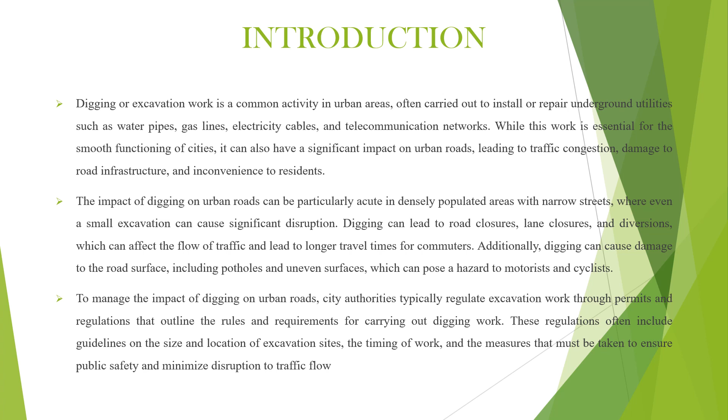Objectives: minimizing disruption. The primary objective of managing the impact of digging on urban roads is to minimize disruption to the community, including motorists, pedestrians, and businesses. This involves planning and coordinating the work to minimize the impact on traffic flow and access to buildings and residences.

Ensure safety. Safety is a critical objective in managing the impact of digging on urban roads. This involves implementing safety measures to protect workers, motorists, pedestrians, and cyclists. Safety measures may include the use of barriers, warning signs, and traffic control devices.

Protect infrastructure. Protecting existing infrastructure is an essential objective in managing the impact of digging on urban roads. Maintain functionality. Another objective of managing the impact of digging on urban roads is to maintain the functionality of the road networks.

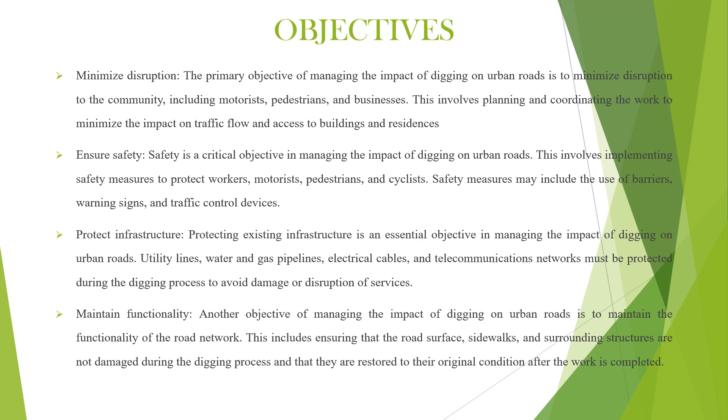Reduce cost and time. Effective management of digging on urban roads can help reduce the cost and time required for the work. Enhance communication.

Communication is a critical objective in managing the impact of digging on urban roads. Clear and effective communication between stakeholders, including utility companies, contractors, local government officials, and the community, can help ensure that the work is completed safely, efficiently, and with minimal disruption to the community.

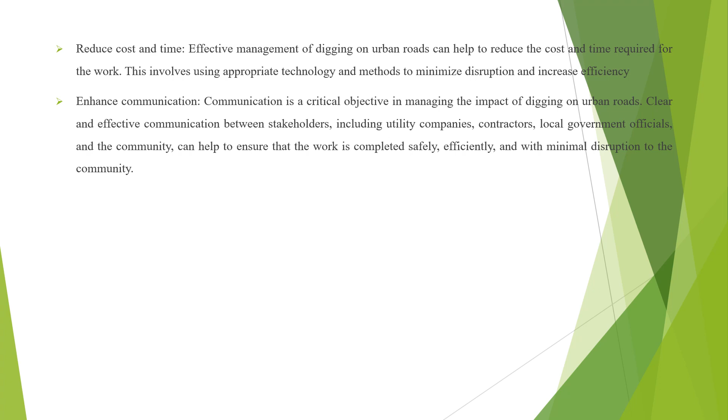Literature review. Clopper and Haddock conducted an economic analysis of utility cuts on pavement performance. The study found that the cost of repairing pavements damaged by utility cuts exceeded the revenue generated by the utility companies.

Reddy and Rao studied the impact of road cutting on pavement performance in urban areas. The study found that road cutting caused significant damage to pavements and resulted in decreased pavement performance.

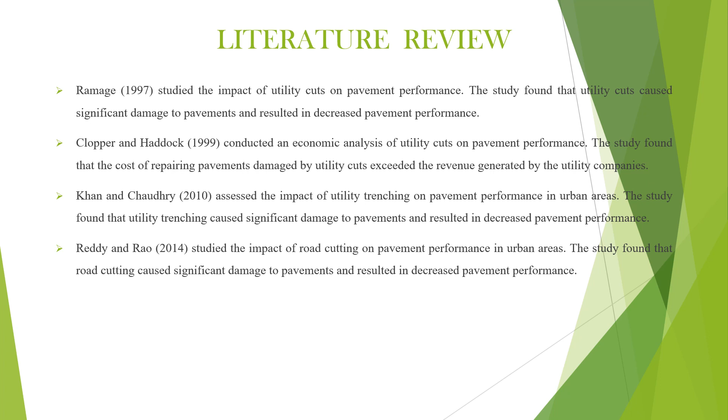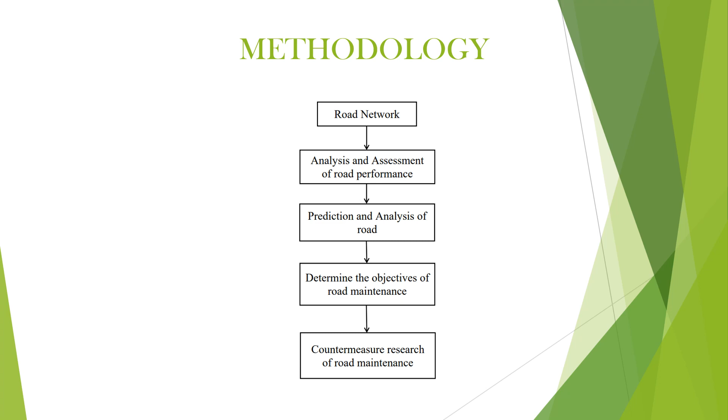Methodology: how it works. First, road networks. Based on that, analysis and assessment of road performance is done. Later, prediction and analysis of the road will be conducted. Then, after conducting that, determining the objective of road maintenance will be done. Later, countermeasure research of road maintenance is done. This is the methodology: road network.

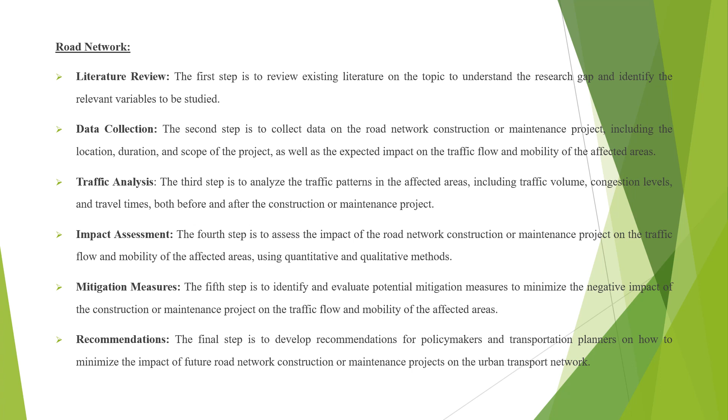It includes literature review, data collection, traffic analysis, impact assessment, mitigation measures, recommendations, and analysis and assessment of road performance.

Defining the research problem. The first step is to define the research problem, which in this case is to analyze the impact of digging on road performance and urban transport.

Literature review: the next step would be conducted through review of the relevant literature and research studies in the field of road performance and urban transport.

Data collection: the methodology would involve collecting data on the digging activities and their impact on road performance and urban transport. Data analysis: the data collected would then be analyzed using statistical tools and techniques to determine the impact of digging on road performance and urban transport.

Assessment of road performance: the methodology would also involve assessing the overall road performance, taking into account the impact of road digging activities. This may involve developing performance indicators such as travel time, traffic volume, vehicle speed, and air quality.

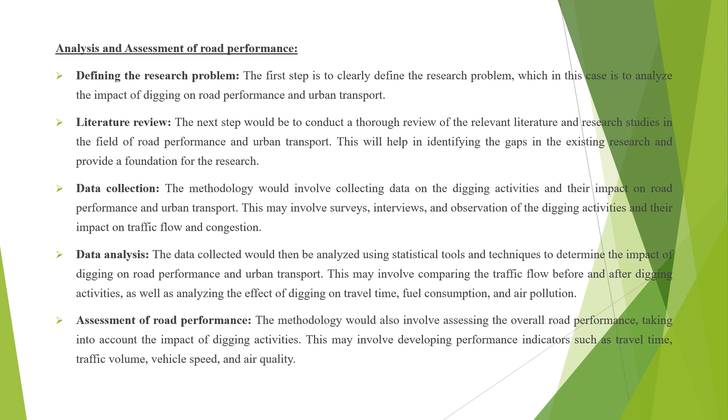Recommendations: based on the analysis and assessment of road performance, the methodology would also include developing recommendations to mitigate the negative impact of digging activities on urban transport.

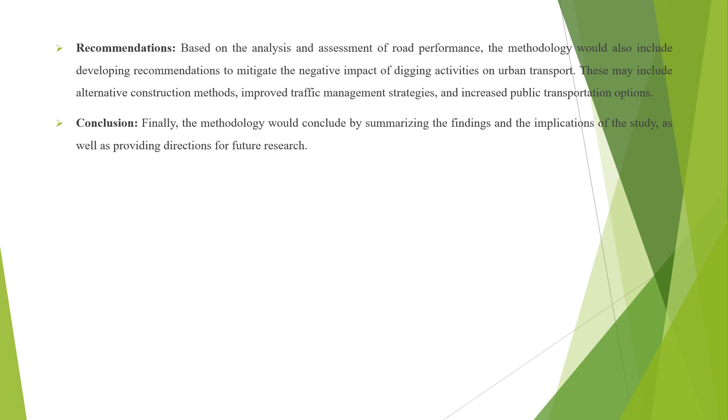Conclusion: finally, the methodology would conclude by summarizing the findings and implications of the study, as well as providing directions for future research.

Prediction and analysis of road: to predict and analyze the impact of digging on urban transport, several factors need to be considered. These include location, duration, scope, and traffic volume.

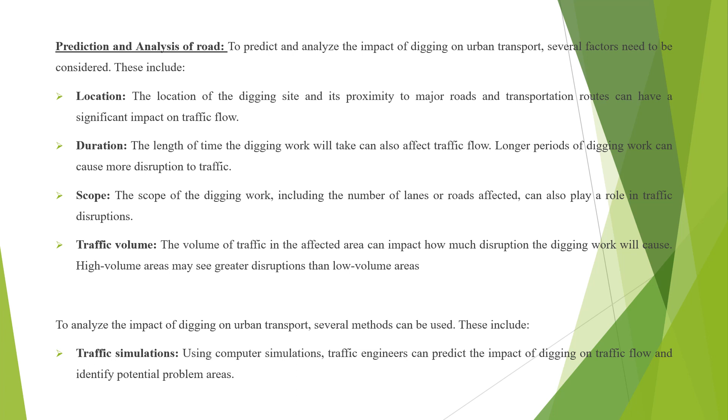To analyze the impact of digging on urban transport, several methods can be used. These include traffic simulation, traffic counts, surveys, and GPS tracking.

Determine the objectives of road maintenance: ensuring the safety of road users. Maintenance activities should aim to ensure that the road is safe for all types of road users, including pedestrians, cyclists, and motor vehicles.

Minimizing traffic congestion: digging activities can cause traffic congestion, and road maintenance should aim to minimize the impact on traffic flow.

Maintaining the road's structural integrity: digging activity can weaken the road structure, and maintenance activity should aim to ensure that the road is able to handle the traffic load without any structural damage.

Reducing the environmental impact: maintenance activity should aim to minimize the environmental impact of digging activities on the road and surrounding areas.

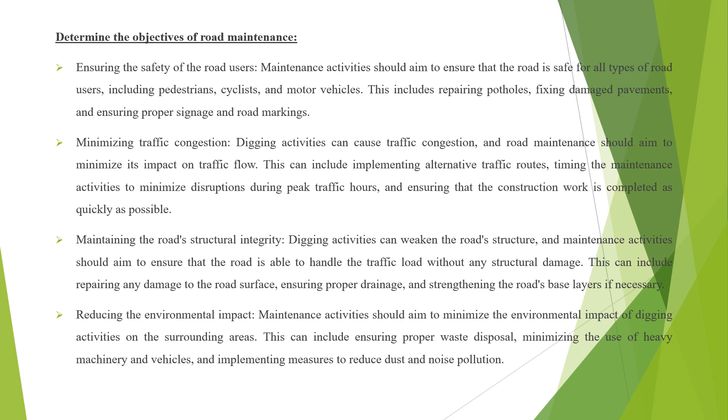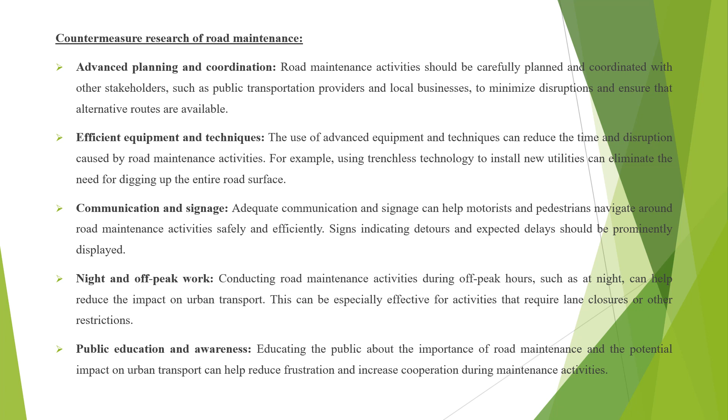Countermeasures: research on road maintenance shows advanced planning and coordination is required, along with efficient equipment and techniques, communication and signage, night and off-peak work, and public education and awareness.

Applications: traffic congestion management, public transportation disruption, pedestrian safety, environmental impact, and economic impact.

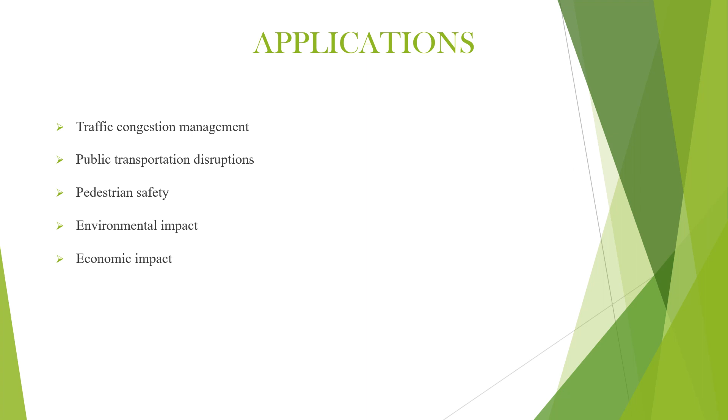Advantages: improved infrastructure, reduced congestion, increased safety, enhanced accessibility, and improved aesthetics.

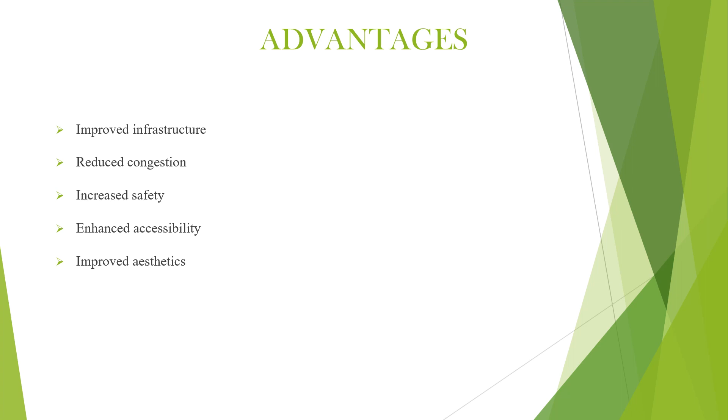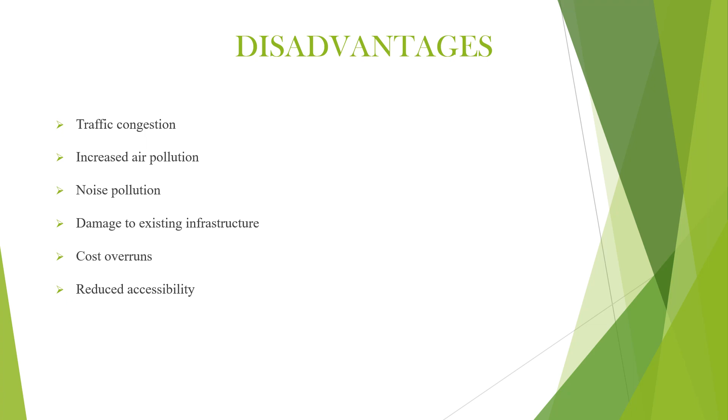Disadvantages: traffic congestion, increased air pollution, noise pollution, damage to existing infrastructure, cost overruns, and reduced accessibility.

Conclusion: the impact of digging on urban transport and its management is a crucial topic that requires thorough investigation and analysis. After conducting extensive research and analysis, it is clear that digging has a significant impact on urban transport and its management.

The excavation of roads and streets can lead to traffic congestion, increased travel time, and reduced accessibility.

In addition, digging can cause damage to underground infrastructure such as pipes and cables, which can result in service disruptions and safety hazards. To mitigate the impact of digging on urban transport and its management, it is important to implement effective planning and management strategies.

This can include better coordination between utility companies and transport agencies, as well as the use of advanced technology, such as GIS and real-time traffic monitoring systems.

Additionally, the adoption of alternative transport modes such as biking and walking can help reduce reliance on cars and fuel consumption.

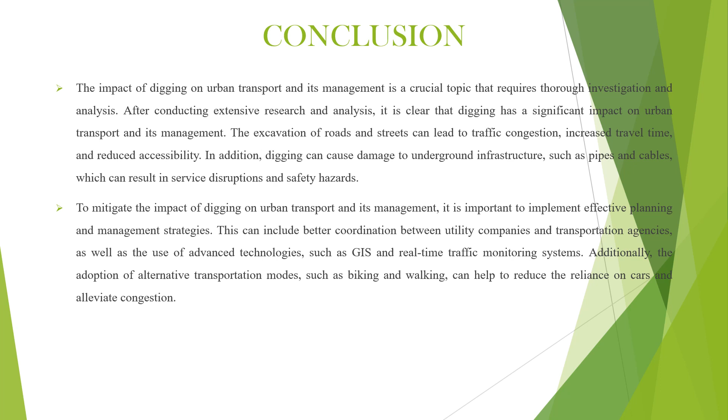References: L. Ramage, 'The Impact of Utility Cuts on Pavement Performance,' Transportation Research Board, 1997. B. Klupler and J.A. Adolph, 'Economic Analysis of Utility Cuts and Pavement Performance,' Journal of Transportation Engineering, 1999. M.A. Khan and A.Q. Chaudhary, 'Impact of Utility Trenching and Pavement Performance in Urban Areas,' Journal of Construction Engineering and Management, 2010. S.P. Reddy and D.D.V. Rao, 'Impact of Road Cutting on Pavement Performance in Urban Areas,' International Journal of Innovative Research in Science, Engineering and Technology, 2014. Thank you.